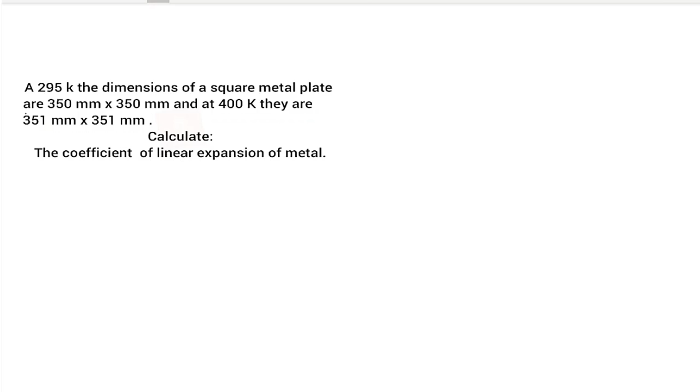In this lesson, we're going to be solving this problem. This problem is under thermal expansion. It reads as follows: at 295 K, the dimensions of the square metal plate are 350 millimeters by 350 millimeters. So at this temperature, the dimension of the plate is this.

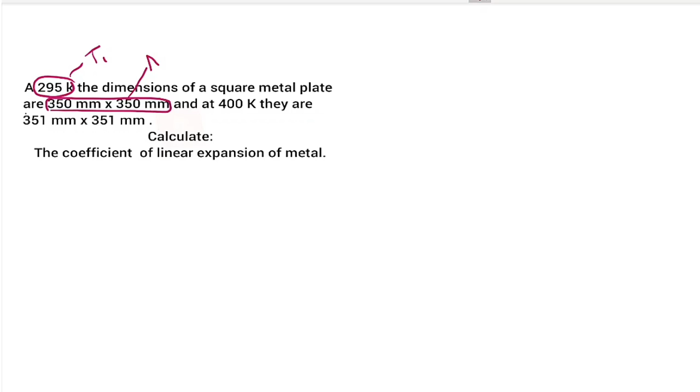That means this is T1, and this is area 1. Then the temperature increases from 295 to 400 K, and the dimension also increases. Here it is matching with this temperature, so this dimension is for area 2. This is temperature 2. Then they say calculate the coefficient of linear expansion of this metal.

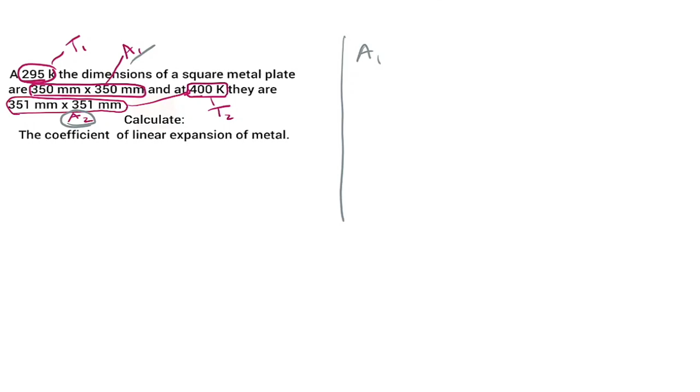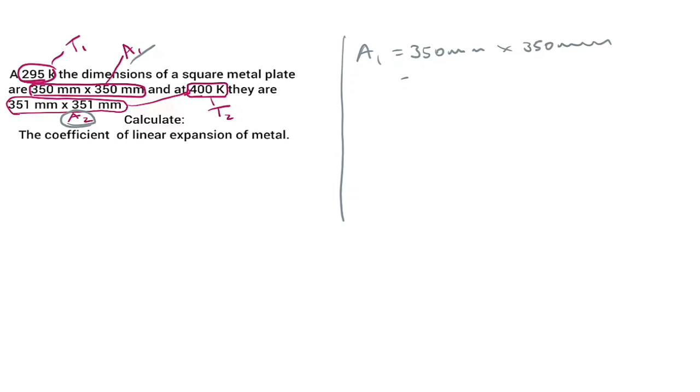We first calculate this area. Area 1 is equal to 350 millimeters by 350 millimeters. This gives you 1.225 times 10 to the exponent 5 millimeters squared, which goes with temperature T1, which is 295 K.

Then let us come to area 2, which is 351 millimeters by 351 millimeters. This gives 1.232 times 10 to the exponent 5 millimeters squared, and it goes with temperature 2, which is equal to 400 K.

Because we're looking for the coefficient of linear expansion, and this statement is talking about the dimension of the area, we're going to use the change in area formula: change in area is equal to the initial area, area 1, times the coefficient of area expansion times the change in temperature.

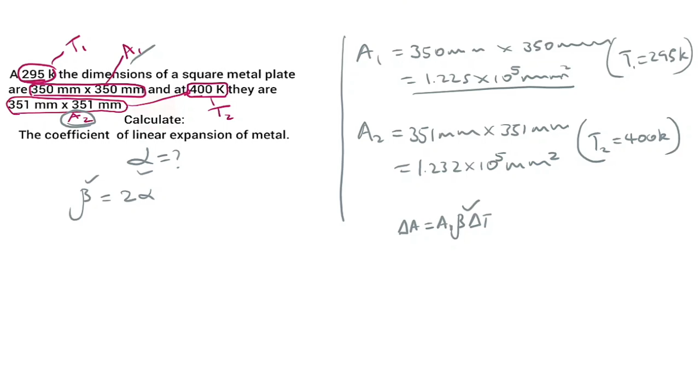The coefficient of area expansion links with the coefficient of linear expansion. How? The coefficient of area expansion is twice the coefficient of linear expansion. That means we have to get the coefficient of area expansion to get the coefficient of linear expansion, and we'll get it from this formula.

Let us do it. Change in area is equal to area 2 minus area 1. The change in temperature is 400 minus 295, which gives us 105 K. Now back to the formula, let us make the coefficient of area expansion the subject: it is equal to the change in area divided by area 1 times the change in temperature.

Let us substitute. Area 2 is 1.232 times 10 to the exponent 5, minus area 1, which is 1.225 times 10 to the exponent 5. Then divide all by area 1, which is 1.225 times 10 to the exponent 5, times the change in temperature, 105.

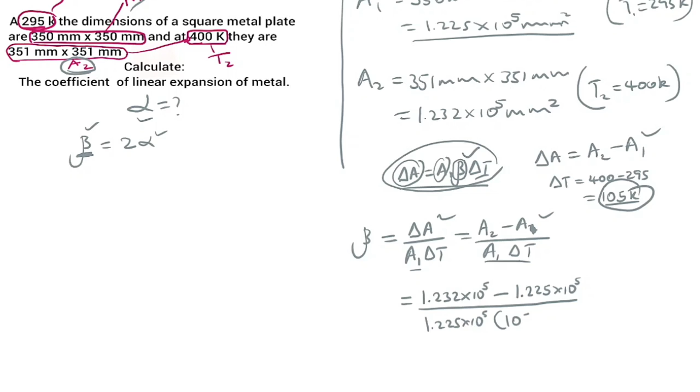From here we get the coefficient of area expansion to be 5.44 times 10 to the exponent negative 5 per Kelvin. This is 54.4 times 10 to the exponent negative 6 per Kelvin. Because we found it now, we take it back to this formula.

The coefficient of area expansion is equal to 2 times the coefficient of linear expansion. Making that the subject, the coefficient of linear expansion is the coefficient of area expansion divided by 2. Substituting, 54.4 times 10 to the exponent negative 6 divided by 2 gives the final answer of 27.2 times 10 to the exponent negative 6 per Kelvin. That is the coefficient of linear expansion we were required to find.

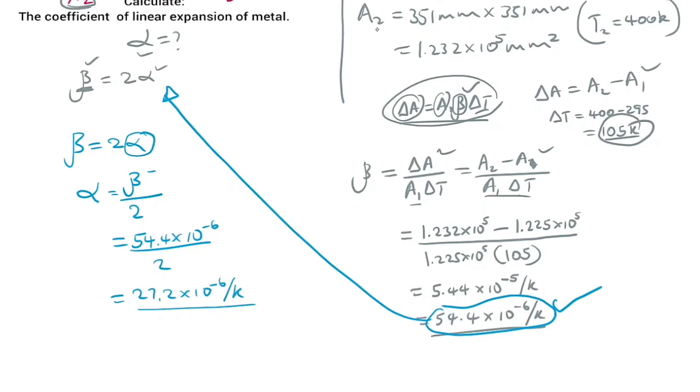I hope you have seen what I did here. Please pay attention and follow it step by step. Pause where you have to pause. Look at this: the problem statement here at first is supposed to say at 295 Kelvin, the dimensions of the square metal plate are.

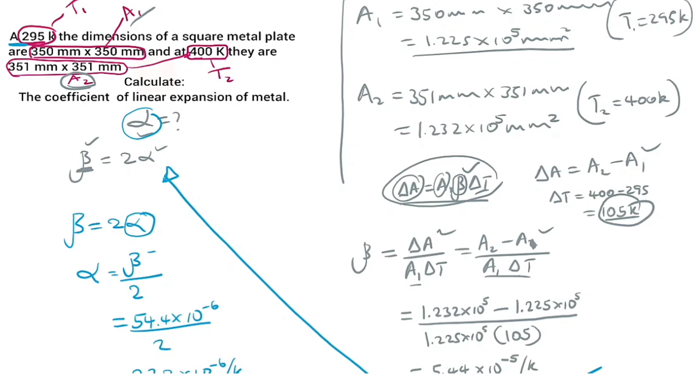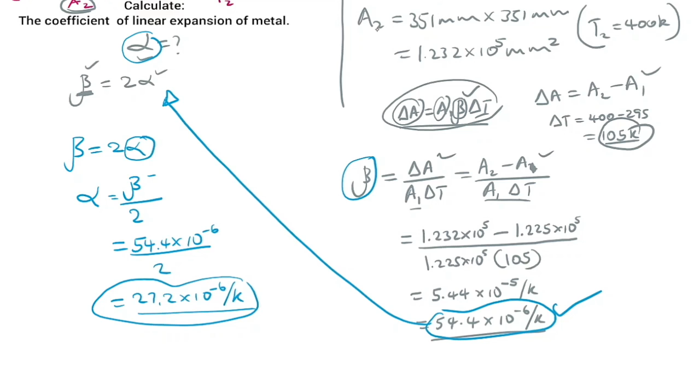But our goal was to find the coefficient of linear expansion. We finally found the coefficient of linear expansion from the coefficient of area expansion, where we used the change in area formula. Then we found the coefficient of area expansion, which we used here.